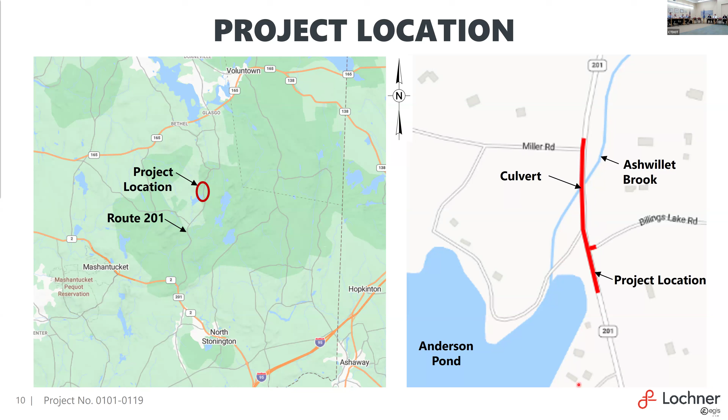The purpose of this project is to replace the existing culvert, which is deteriorated and in poor condition. The Route 201 roadway has also been experiencing settlement due to the deteriorating culvert. CTDOT maintenance has performed frequent maintenance and pavement patching to keep this roadway functional.

In the pictures below, you can see some rocks that have broken through one of the metal pipes. And on the right, you can see that the metal pipe is actually separating from the concrete structure.

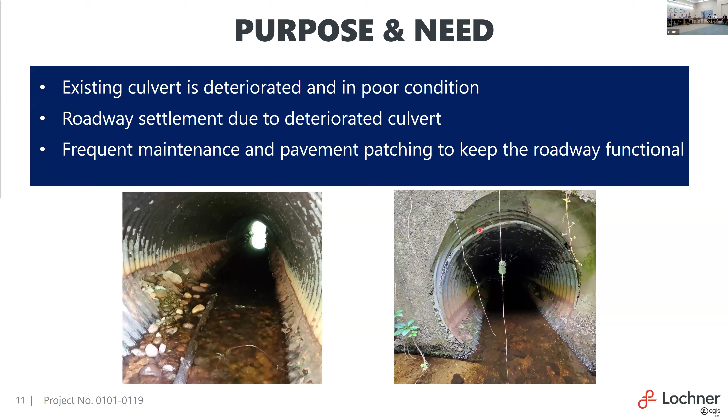The existing structure consists of two 48-inch diameter corrugated metal pipes. The pipes are approximately 50 feet long with about 3.4 feet of cover under the roadway surface. These pipes were installed in 1939, and along with the physical deterioration, they are hydraulically inadequate.

The photo on the left is at the inlet side of the culvert where water is flowing in from the Anderson Pond. On the right, there's a photo of the outlet, one of the pipes. And again, you can see how the metal pipe is pulling away from the concrete structure.

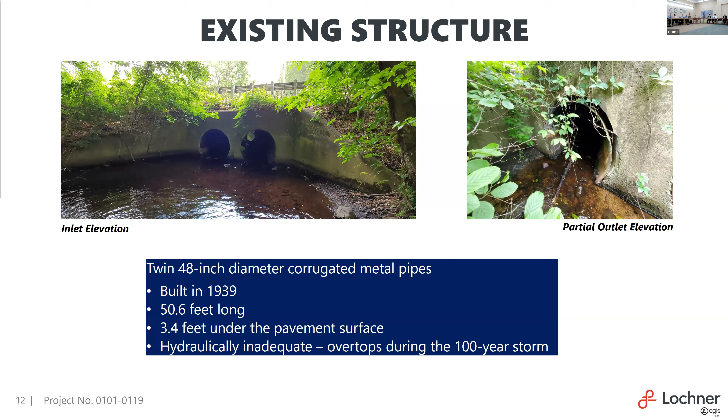Moving on to the roadway existing conditions. Shown here is Route 201 looking northbound. Billings Lake Road is on the right side of your screen. You can also see in this picture a recent pavement patch. This is actually right above the existing culvert, and that's due to the deteriorating culvert and settling roadway.

So Route 201 is classified as a rural major collector. It sees about 1,300 vehicles per day based on 2024 traffic counts and has a posted speed limit of 40 miles per hour. The roadway consists of one 12-foot wide lane in each direction with shoulders that vary from about 1.5 to 3.5 feet in width.

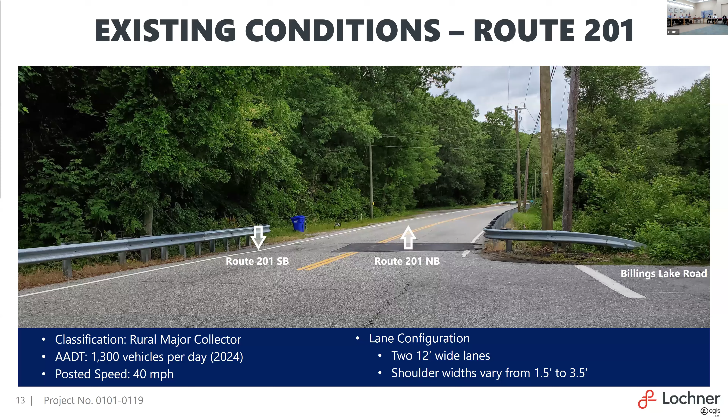Moving on to the proposed improvements. Starting with the structure itself, the existing metal pipes will be replaced with a reinforced concrete box culvert. In this plan image shown below, Route 201 is running in the north-south direction, Billings Lake Road to the east. These two blue dashed lines represent the existing metal culvert pipes, and this orange shape represents the proposed reinforced concrete box culvert.

The box culvert will be approximately 52 feet long, 18 feet wide, and 7 feet high. The culvert will include reinforced concrete wing walls at both the inlet and outlet sides of the culvert. There's also a concrete barrier along both edges of road on Route 201.

The roadway itself will be widened by about 25 feet at the culvert location. These red dashed lines represent where the existing edge of road is located today. So you can see the extent to which we're widening.

Hydraulically, the increased size of the culvert will meet demand for a 100-year storm. Also, native stream bed material will be placed within the structure, and a low flow channel for fish passage will be provided. The native stream bed material plays a role in shaping the channel and also providing a habitat for the fish.

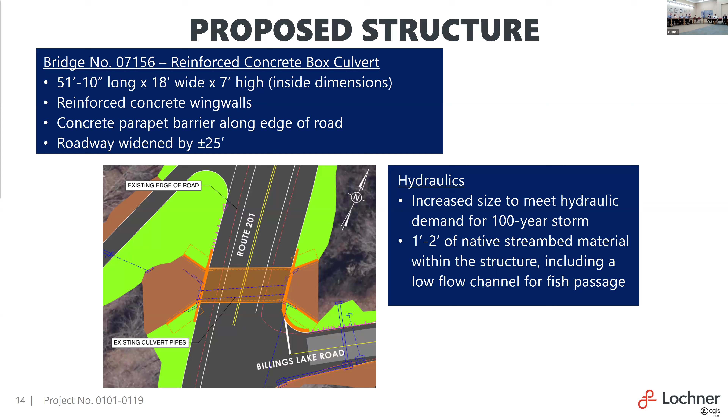Moving on to the roadway improvements. Shown here is a plan view of the project. Route 201 is running left to right across the screen. Billings Lake Road is located here. The new culvert, again, is located just north of Billings Lake Road.

Route 201 has been designed using a design speed of 45 miles per hour. However, the posted speed limit will remain at 40 miles per hour. We're proposing roadway widening at the culvert location for increased shoulder widths, including an 11-foot wide southbound shoulder and 14-foot wide northbound shoulder.

Again, these red dashed lines represent where the existing edge of road is located today. These increased shoulder widths will ensure that cyclists have enough room and that the culvert will not require any further reconstruction if sidewalks are added in a later project. In addition, the northbound shoulder here is especially wide to provide improved sight distance and turning movements for vehicles leaving Billings Lake Road.

In addition, south of Billings Lake Road, in this area, in this brown shape, we are proposing a cut to the existing embankment. This will improve sight distance for vehicles leaving Billings Lake Road that are looking left down Route 201. Also, in order to meet our new culvert requirements and provide enough pavement depth, the Route 201 roadway will require approximately 10 inches of profile raise.

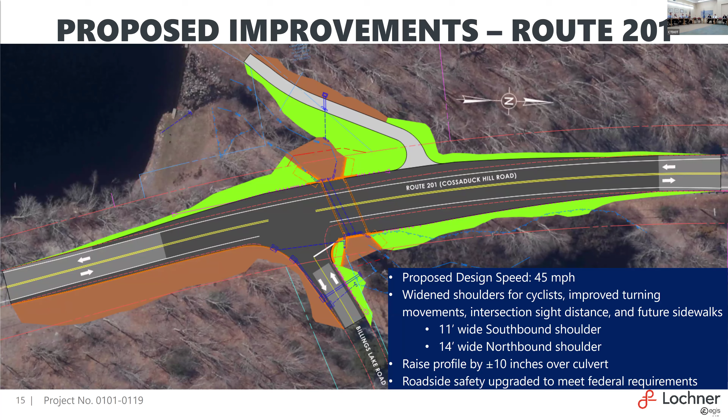This next slide is the proposed profile of the roadway. You can see a dashed gray line that represents the existing profile of the roadway. The culvert is located here. You can actually see a dip in the existing roadway profile, and that's due to the settlement at the existing culvert. This solid black line represents our proposed profile, which again is about a 10-inch raise at the culvert. In order to provide this profile raise, about 600 feet of the roadway will be raised with about 420 feet of full depth roadway reconstruction.

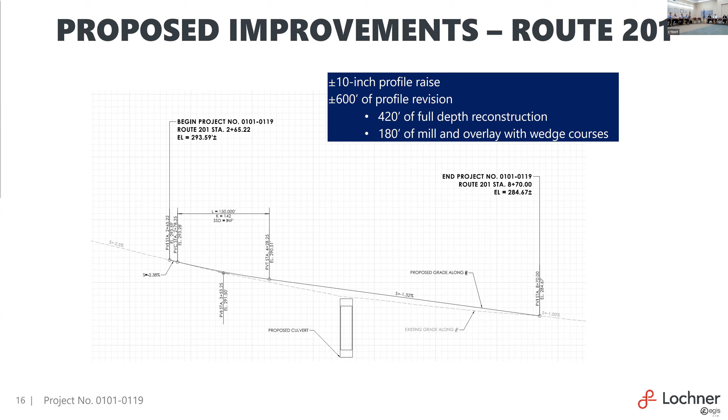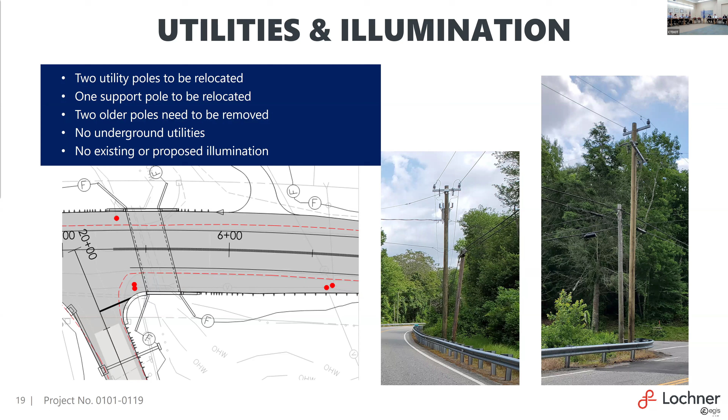At 164 Miller Road, there's a partial acquisition, construction easement, and rights to grade, construct driveway, and install and remove drainage structures and pipes. At 156 Miller Road, there's a construction easement. Next, Kathleen is going to talk about CTDOT's right-of-way process.

Thank you. So again, my name is Kathleen Erickson, and I'm a project coordinator with the Department's Division of Rights-of-Way. Our office is responsible for acquiring property rights that are needed for transportation projects all throughout the state. So I'll just be giving you a brief overview of what the acquisition process looks like.

Before I get further into that, though, I do want to mention that the property impacts for this project are still being finalized, so they could change as the design progresses. Also, any property rights that are acquired are done so in accordance with Connecticut General Statutes, sections 13A-73 and 13A-98E, as well as the Uniform Act.

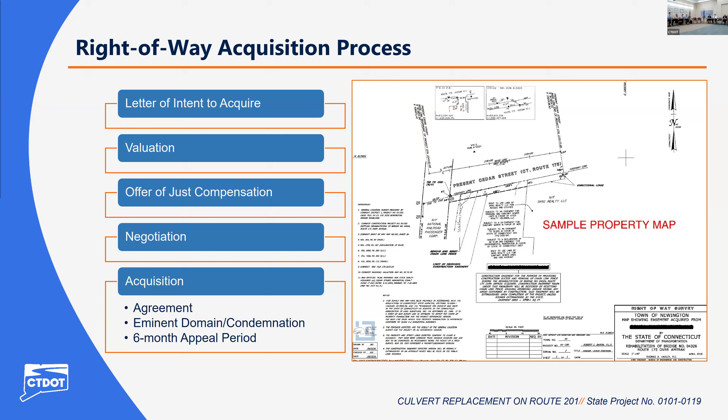It is important to note too, the state will only be acquiring the property rights that are necessary for this project. But if there are any questions regarding the right-of-way acquisition process, I'm happy to answer them during the Q&A portion of tonight's meeting. But for now, I'll turn it back over to Chris to continue on to the presentation. Thank you, Kathleen. All right.

In order to construct our proposed culvert and roadway improvements, we have broken down construction into 4 stages. In stage 1, this is our main stage. We're going to close Route 201 north of Billings Lake Road. We'll install temporary traffic signals on Route 201 and Billings Lake Road in order to allow vehicles to continue to enter and leave Billings Lake Road. Once this closure is in place, there'll be a detour that's signed.

In this stage, we'll construct the private driveway at 164 Miller Road. We'll install water handling for the construction of the new culvert. We'll construct the new culvert and wing walls. We'll backfill the culvert and construct the proposed roadway above the culvert. This stage will take approximately 6 weeks.

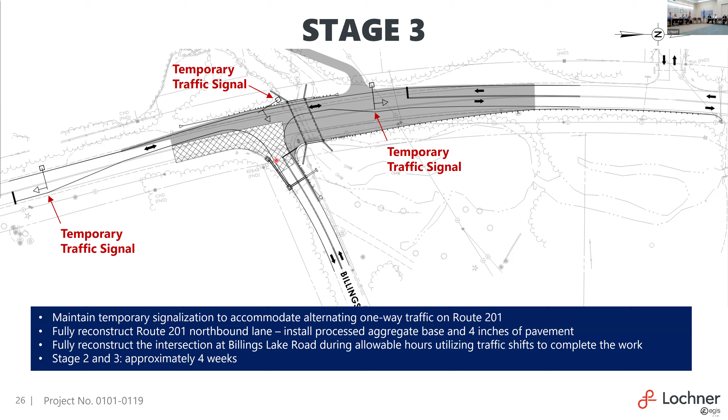Stage 4 is the final stage. Traffic will be shifted into its final configuration. We'll mill the pavement within our project limits and place the final 2 inches of pavement. All drainage structures will be reset to their final grade. We'll install the final pavement markings and any final curbing. This stage will take approximately 1 week.

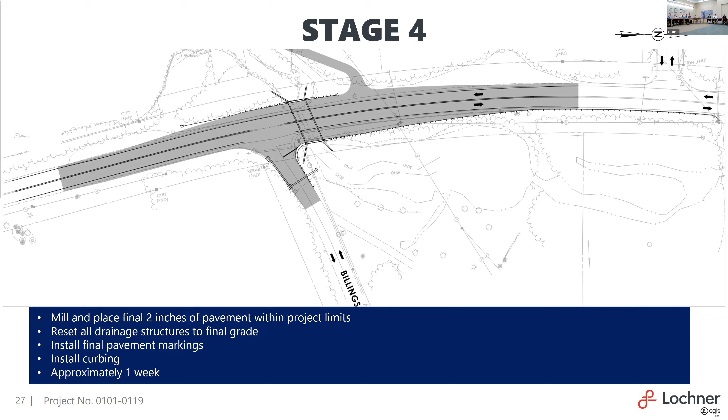This project is located in an area of moderate to high sensitivity as it relates to historical and archaeological features. A phase 1 archaeological investigation has been completed, and the finding was that no archaeological resources are affected.

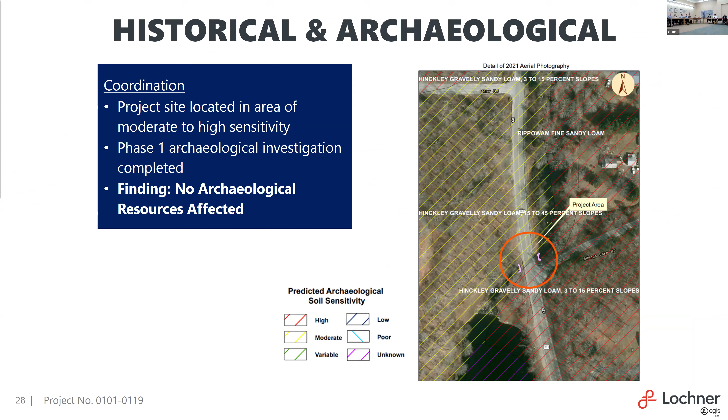This project also requires some environmental coordination and permitting. Coordination has begun and is ongoing with the CT Department of Energy and Environmental Protection, U.S. Fish and Wildlife Services, the Natural Diversity Database, and the State and Tribal Historic Preservation Offices. The expected permits for this project are listed here.

The estimated construction cost is $5.1 million with a funding source of 80% federal funds and 20% state funds. The current schedule is that final design plans will be submitted in April of 2028, with advertising for bid in August 2028 and start of construction in spring 2029. This schedule is subject to having the available funding in place.

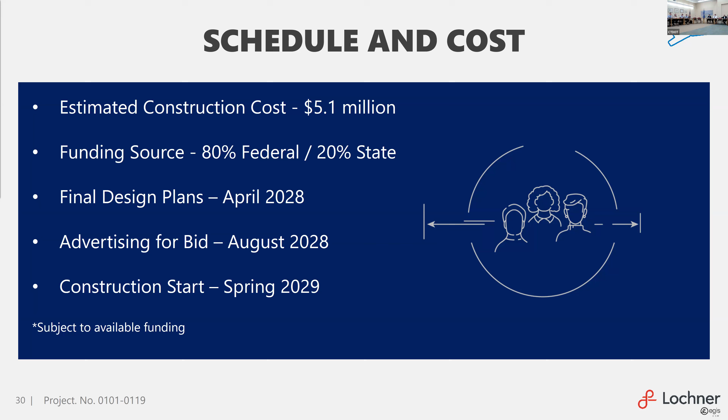So that concludes the formal presentation for project 101-119. We'll begin the question and answer session shortly. I just want to reiterate, there are 3 separate ways to submit questions following this meeting. You can submit questions to our project email at dotproject0101-0119@ct.gov. You could also leave a voicemail at 860-594-2020. And you can submit a question during the live Zoom session that's happening right now. Submitting a question through Zoom is only available during this live session.

And again, the period for submitting questions and comments will be open until April 27th, 2026. And last, the project webpage is shown here where you can find additional information on the project, including the project description and roll plan. With that, James is going to conduct the Q&A session. No questions coming in on Zoom right now, so we'll turn it to the room.

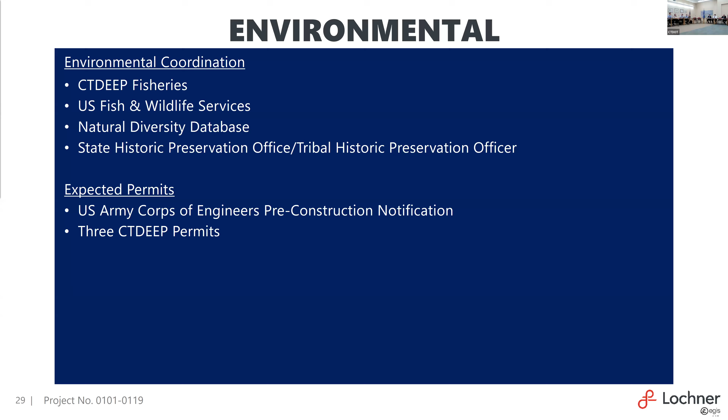I'm here representing the Billings Lake Tax District, which owns the dam and the property just upstream and downstream. It's not clear to me what you're planning to do. I'll check that out. Yeah. This is basically your district right there. This is your property, right? This blue line right there. This is your property. All right.

So basically, what we are doing in this area, we are just doing some rerouting of the swale, end wall, not that much work, some grading. That's all we're doing. There's not any big construction going on in your area. Just a little bit of take up here, which is drainage. So down the road, if CTDOT needs any maintenance of that swale or the box culvert, they can go there and maintain it. That's all we're doing there, which is this red line right there.

You're going to clean everything out downstream of that? So from here to there is box culvert, then it is open, which is going to be stone riprap. This is for future maintenance. Down the road, if there's any maintenance needed, CTDOT can go there and take care of it. That's it. And this right here, we're not touching too much up there. It's just grading happening in this area because of the driveway. Just minor grading. This green shaded area is just the grading area for this driveway.

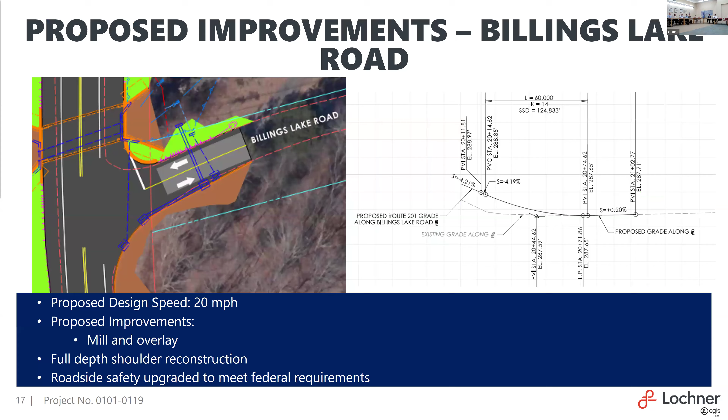Hi, I'm at the corner of Miller Road. I'm just wondering if I could have a copy of the picture that you showed of the whole detour route, so I could tell them what's going on. I don't think it will affect us too much, but those that know the road will certainly be aware of it. And you still have to allow the whole time for Billings Lake Road people to get in and out. That's the tough part.

It shouldn't be, because we used the design vehicle of the big trailer. If they want to get in with the boat, they can get in and get out. Yeah, that's the one, I would like a picture of that. This entire picture is on the website, right? You can select them and get it there. All right. Thank you. We may have that printed out after the meeting.

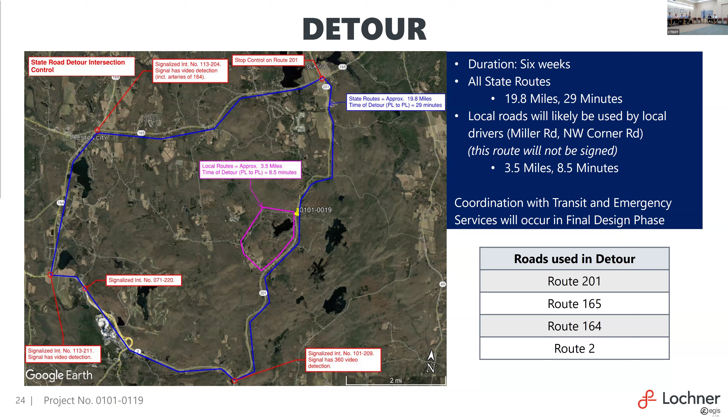The construction that's going to take place on the tax district property, is that going to be defined? Absolutely. And when will that happen? Maybe 5 to 6 months, once we get to the next stage and the plans are done, Kathleen in her office is going to start the process. And if there are any questions at that time, we have a project engineer, James, you can always contact him, he will be more than happy to speak to you.